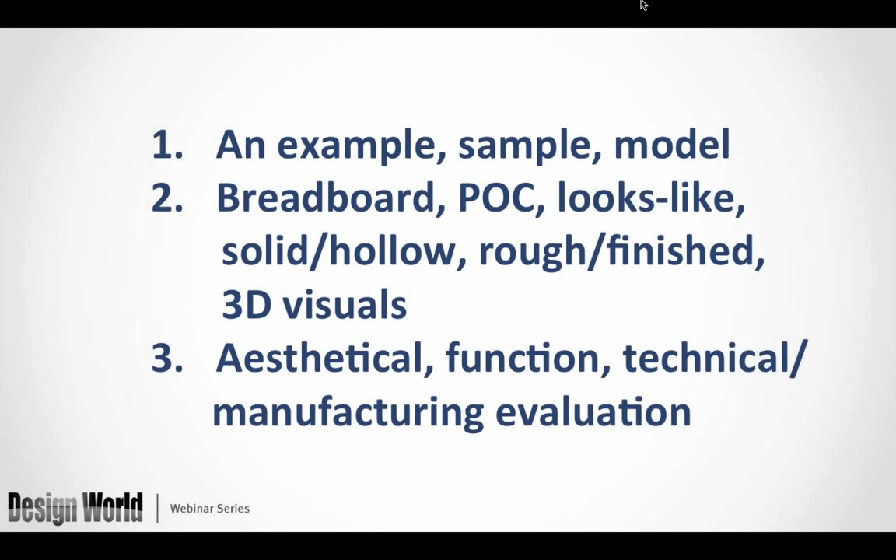From the standpoint of what the prototype means, from a hard definition to slang and terminology, how does it function? What is its meaning as far as what it provides for the development process? It can be from an aesthetical standpoint, functional, or a technical and manufacturing evaluative tool.

Now, the next thing you need to do is answer three very important questions as we're developing an understanding of what prototype means. You need to understand what it means in the context of your organization and the work you do, and evaluate how you're going to develop and integrate prototyping into your process.

Number one, very important: what business are you in? It's very easy to just utilize models and develop objects without really understanding, and reminding yourself, the business that you're in.

Are you in the business of developing ideas? Are you in the business of putting things to market quickly? Is it around economics? Is it around competitive environments or categories that you need to be swift to move in and out of? Is it a trend-related business where you need to constantly be on the forefront of emerging or mega trends? Carefully understanding and answering what business you're in is critical to developing the right way to integrate prototyping into your process.

Then, what is your creative development or manufacturing process? What is the process you follow to develop concepts and ultimately deliver to the marketplace? And then a careful and substantial analysis of how you make things within that process. So again: the business you're in, the creative process you follow, and how you make things—what types of equipment, what types of machines, what type of people, etc., are making the things that you develop.

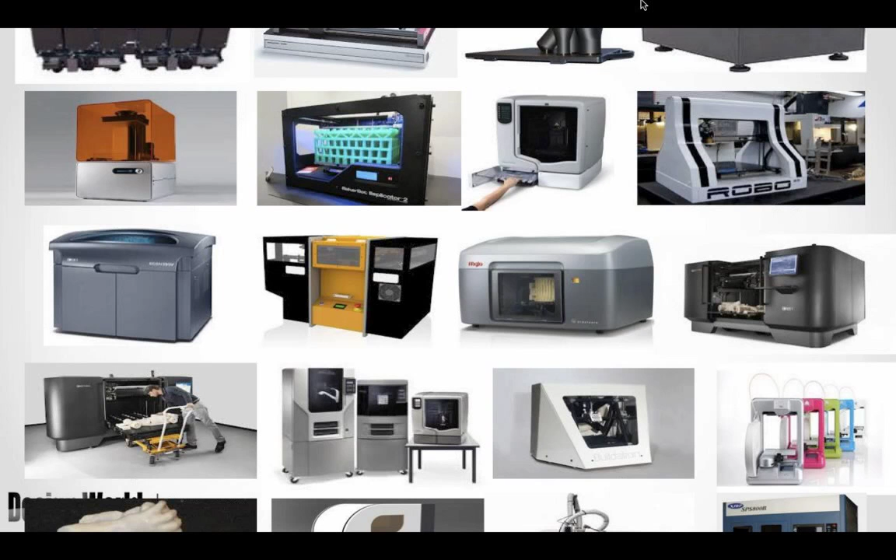Well, the issue then is there are so many out there. What do I choose from? There are large ones, small ones, additive, subtractive, complicated ones, tabletop ones—a myriad of various things out there.

Now, before you get overwhelmed, wait—let's back up for a moment. Whoever said that you need to only get one 3D printer? Many times people jump to the conclusion that it's one new thing, one new object that you need.

A very simple comparison would be: as a car mechanic, does he or she only have one tool to fix cars? And the answer is, of course, no.

So to make things in today's business world, you need a vast array of different methods. And you have to do things faster, bigger, and better than you ever have before. That's just the requirement of today's economics and structure of companies. And you have to have a culture, leadership, and vision that supports your change.

Above and beyond all that, it's the understanding that process is king. So as you're developing a complete understanding of who you are, what you do, and analyzing yourself in a new process, let's look at a process that we utilize and think is very important and supportive of integrating prototyping into the process, particularly with 3D printers.

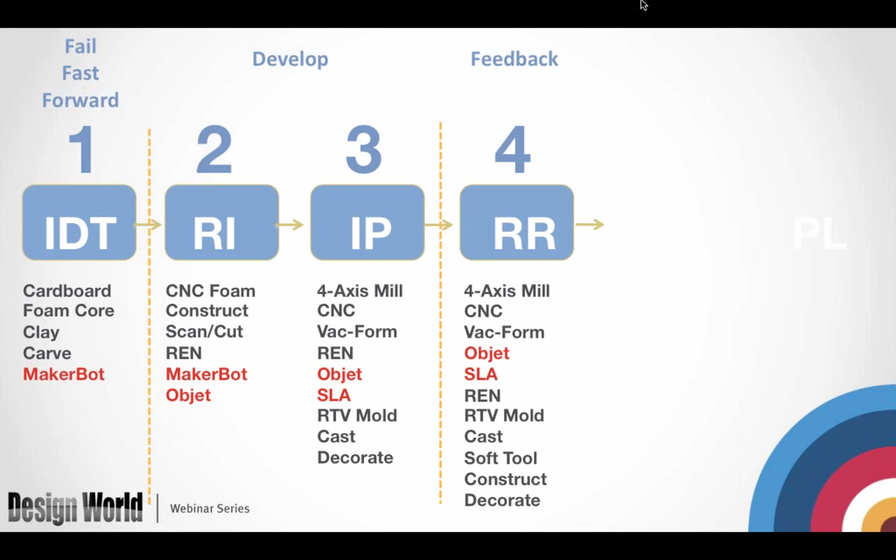And then 4 is the feedback, again putting it in front of consumers, in front of stakeholders, both customer side, client side, and our own team. It's the same array of things as in 3 with the additional component of soft tooling and constructing objects, where we might be doing more research type endeavors that could be in-house, in-home, central location testing, things of that sort.

The last implementation component and how and what we use in those processes would be technical refinement through to production liaison via Objet, down to the level of smaller pieces and parts, but actually maybe even utilizing Objet, the newer one that Stratasys has, where it replicates soft tooling for injection mold, and even in some trial things we're doing with blow mold. SLA we're still using to understand the part integrity, as well as into a production liaison.

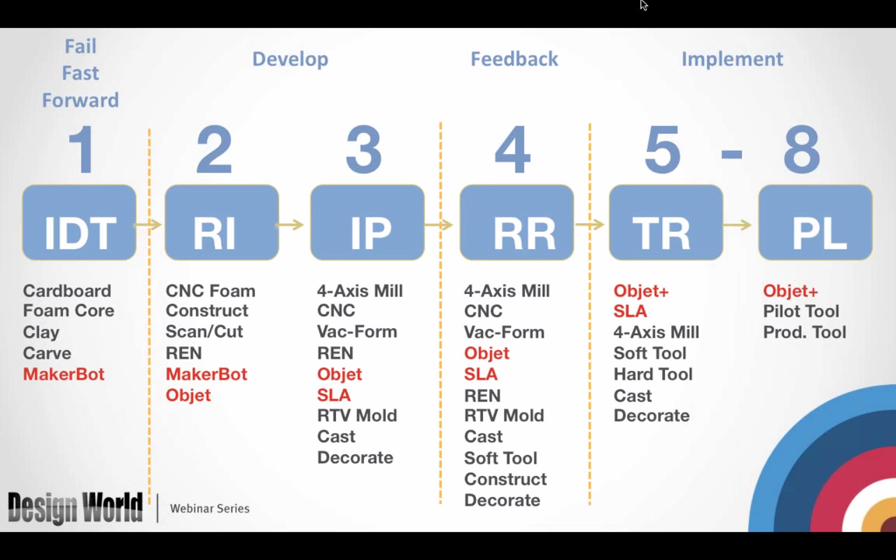Then when it goes to rapid ideation in phase 2, we're utilizing REN material, we're utilizing 3D database and a combination of CNC and actually 4-axis mill.

And then in 3, iterative prototyping, we're then starting to develop hollow objects. This happens to be a thermoform mirroring the hollow component so that we can pour liquid in it and then have people interact with it.

And then 4, feedback. What we're taking is the object from 3, enhancing that technically, and then adding the brand and graphic communication. In this case, it's a full body shrink band.

And then in technical refinement, 5 through 8, we're developing actual soft tool blow mold. And then in the final one, it's actually high volume blow molded containments.

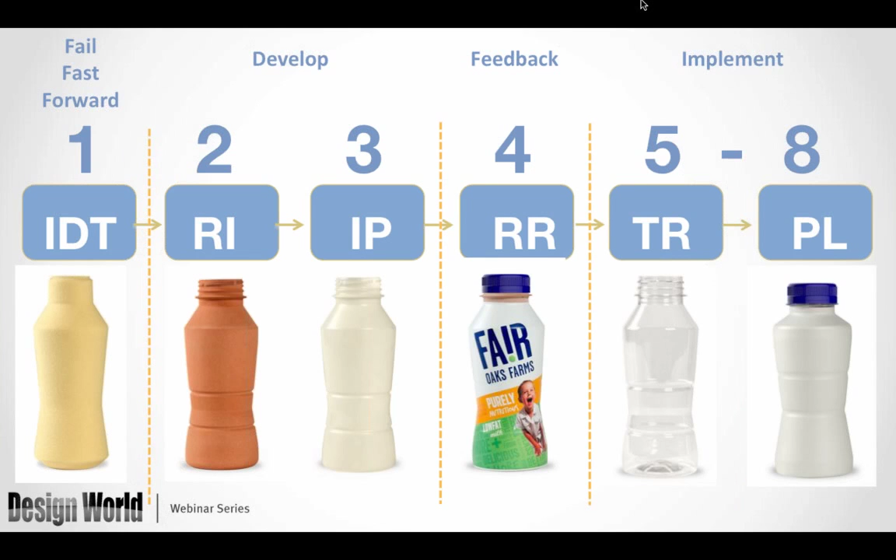So what have we learned about process and about model making, which incorporates 3D printers as well as other methods for model making?

One of the important things is to learn to fail often. This might seem counterintuitive, because the thought going in might be that 3D printing and rapid prototyping and efficient processes make surer decisions and quicker to market, and usually we think of that as succeeding immediately. Well, the reality is you learn to fail often. If you fail often and faster, you get better decisions and better designs quicker. It immediately seems counterintuitive, but it is the crux of the most successful design and marketing organizations today.

The next is to think different. Thinking different means, quite simply, don't keep thinking the way you used to and don't think about it the way it was done before. What we've learned is to really be able to think differently day in and day out as you're developing processes, reevaluating yourselves, and evaluating the design programs you're undertaking.

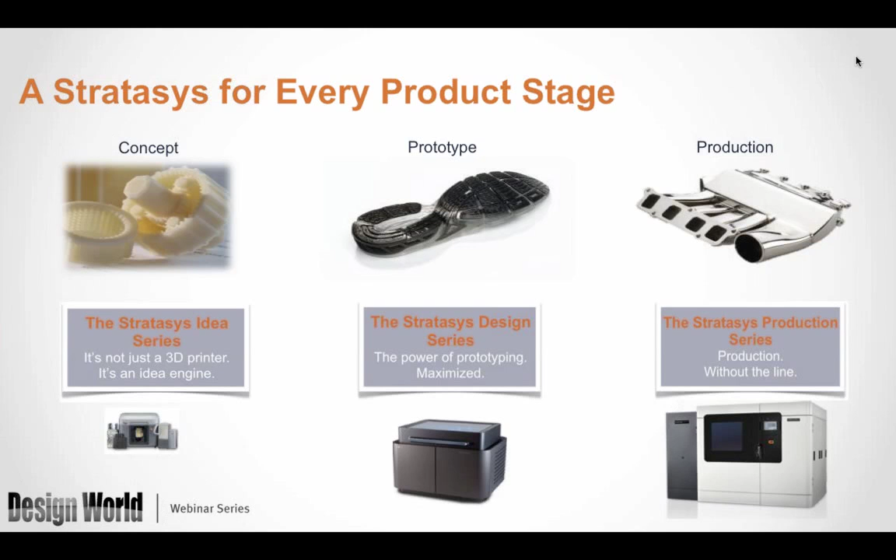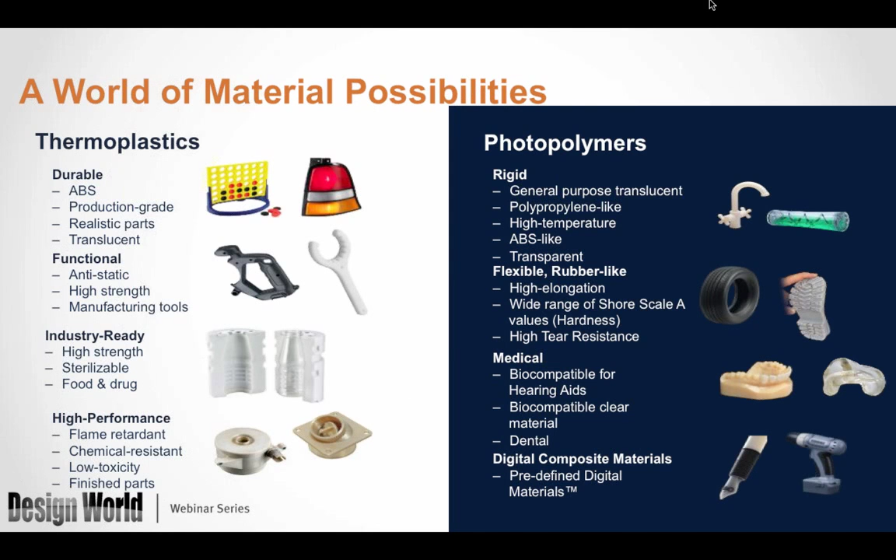And they're all plastics. Then on the right side, what you'll see is our photopolymer side, and this is our Objet or PolyJet technology. With that technology, we have the ability to print rigid plastics, but also flexible rubbers, ranging all the way through your standard plastic ABS-similar materials, all the way to biocompatible materials for hearing aids and materials for dental. We also have a technology called Connex, which gives us the ability to combine 2 materials in a single machine, in a single print job, and actually create new materials we call digital materials. So if we take one of our rigids and one of our flexibles and combine them together with our Connex technology, we can create new materials.

So the last thing I wanted to show you guys was basically how in the new Stratasys company we have 2 separate technologies, but both that complement each other very nicely. Here you see our Objet machines, which use a PolyJet technology. The PolyJet technology uses a liquid resin. It's a photopolymer, so it's cured with UV light. We lay that liquid resin down in a tray, we cure it with a UV light, and that's really the basics behind the Objet technology. We have lots of different types of resin, from rigids to flexibles, from opaques to clears, but it's the same process for each resin.

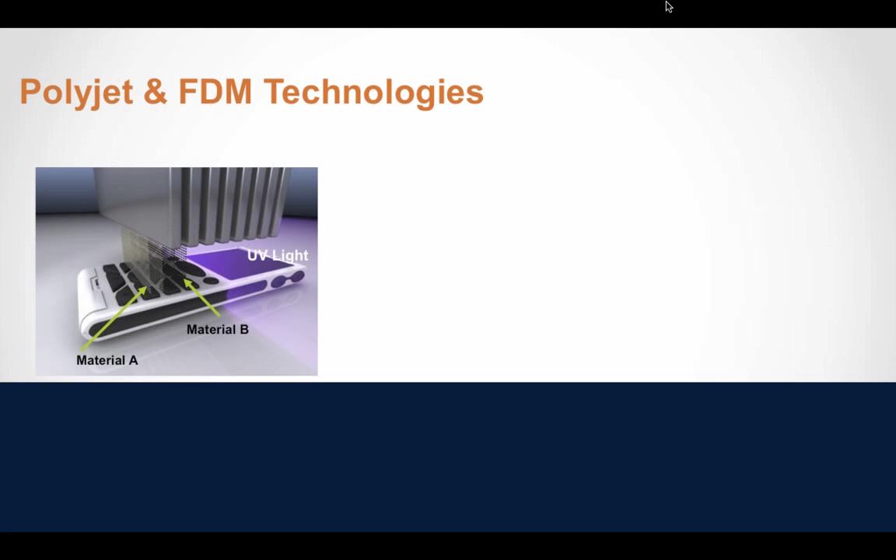And with that technology, we see that it lends itself towards very fine details. We have an incredibly high material versatility of over 120 materials, including our regular base materials, but also our digital materials, the combinations that you can get on the Connex technology. What that really offers us is a product realism, something that only the PolyJet technology can really bring to light, being able to take those rigids and flexibles and combine them, create new materials, or create several materials within one assembly or one build.

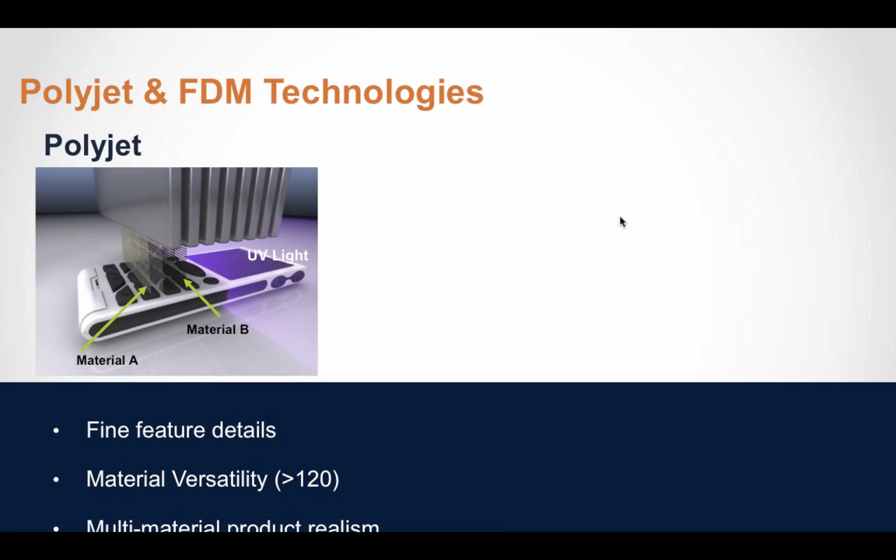Moving over to our FDM side, what we're looking at here is a fused deposition modeling technology where we're using a plastic filament or strand, and we're bringing that through a liquefier and an extruder. What we're doing is actually tracing out a layer, and then once that layer is complete, tracing a layer on top of that until we build a full part. What that technology brings forward is really a range of engineering materials that is a step above what we're used to. As I mentioned, the Ultem material is a step above our ABS, where you have a high chemical resistance.

You have a flammability rating to it, a very, very high strength to it. And what this really offers us, as I mentioned, was complementary technologies, a technology where we see that throughout fit, form, and function, we have the ability to have precision, and also precision and material properties on the FDM side.

So as Jim mentioned, and I think it was a great point that he brought up, people often think or are led to believe that they need to pick, quote unquote, the right 3D printer. Something that I myself have always believed and taught is that no one printer, one technology can do everything for you. I always said that if you can find a printer that will do approximately 80% of your prototyping, that's excellent, and then that other 20% you can go to a service bureau for. What I really like with the pairing of these two technologies is that the PolyJet and the FDM technology complement each other, and together those two technologies can tackle almost every prototyping need that you will have as a company.

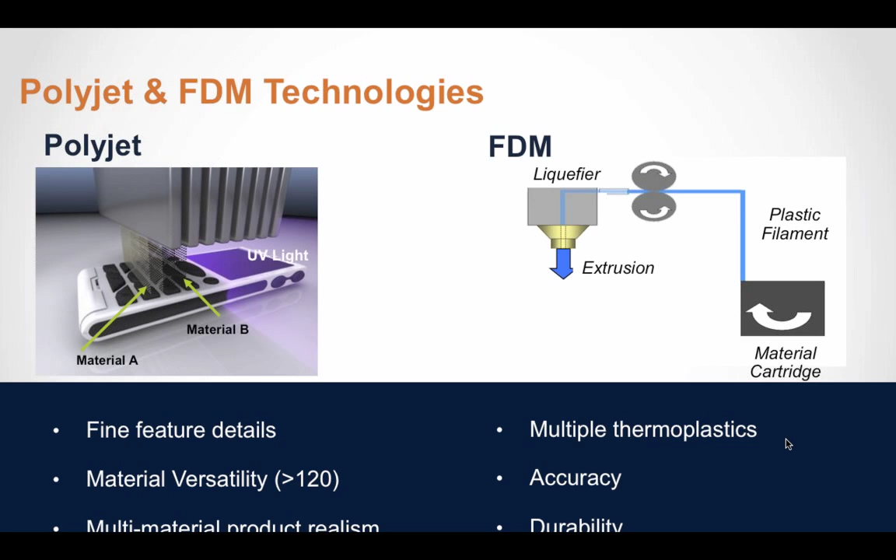So one of the first ones is, with 3D printing, are there any warpage issues? And if so, is there a rule of thumb on what to expect? Either of you want to take that one? Sure, I'd be happy to take that one.

Yeah, this is Jerry. Warpage can be an issue depending on how thin you print your walls and which material you choose. The best guideline to avoid any material warping is to make sure that you choose the correct material for the correct application. As I mentioned, we now have a range of, from the Objet side, over 120 materials. For the FDM side, a whole nother 20 plus materials. There's a lot of materials we can choose from. We just want to make sure that for a given application, we look at pressure, we look at temperature, and we choose the right material for that application.

Okay, this one might be directed more for Jim. You use a number of construction methods to build prototypes. Do you find that having 3D printing capabilities reduces the effectiveness or utilization of these other methods, such as foam core, cardboard, and so on? No, not at all. I think they're all complementary. As Jerry's gone over, the things a 3D printer can provide are replications of real, actual produced parts, and do a tremendous job of that. With the choice of materials, you can create anything that replicates something real. Utilizing cardboard and foam core and things of that sort will get you roughed out designs and solutions. So it's not that one takes over the other or is better or worse than the other. I think you need to utilize a myriad of different modeling techniques to design, develop, validate, and implement work into the marketplace. So I don't think it's a matter of one bastardizing the other or degrading its capability. I think they're all very complementary and need to be done accordingly.